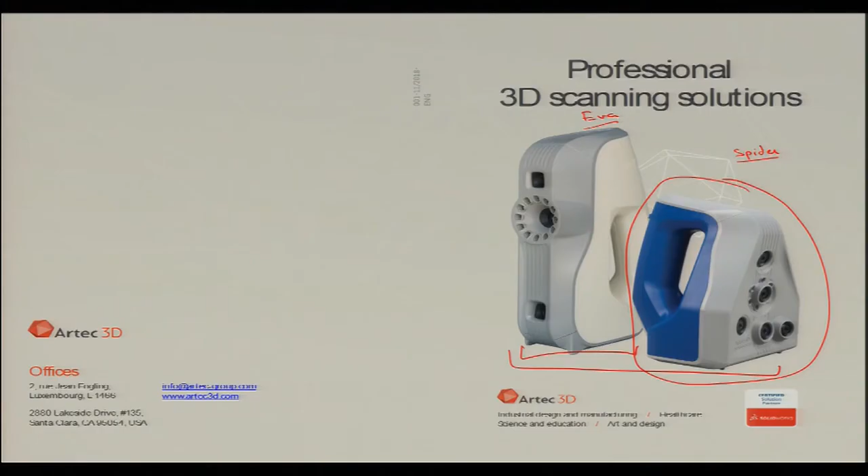Artec Eva can scan objects and we can have high resolution objects here. It is a tried and trusted product, as the companies say, used in a wide range of industries such as quality control, automotive, medicine, and heritage preservation.

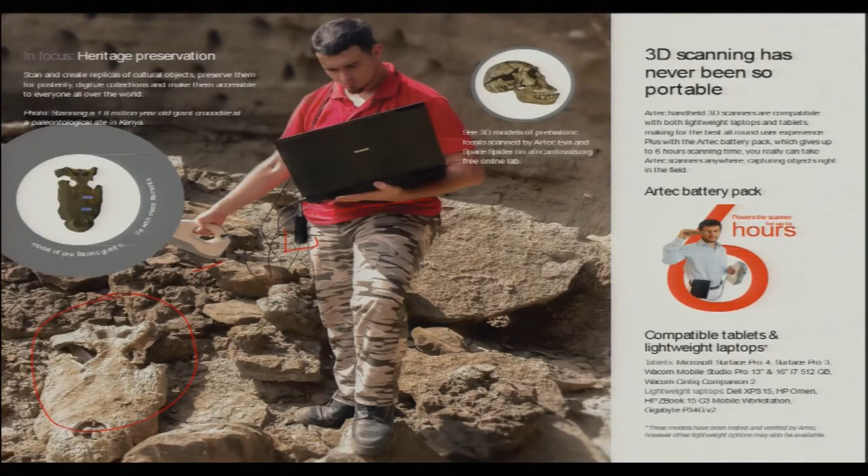This can be done in two ways. Either we rotate the object that we need to scan - I put my scanner in a stationary position and rotate the object, which is what we will do in the lab. Or, if the object is big and we cannot rotate it, or we don't have a turntable, we can keep the object stationary and take our scanner around it.

What it is essentially doing is taking multiple images, like a panorama view in our mobile or regular cameras. We have multiple pictures that are aligned into one. They select a raster line - when there is some overlapping, they select this point where the overlapping happens and produce this object. This raster kind of scanning is done using this scanner.

The other scanner, ATOS Pizza, which we will discuss in the next lecture, is a kind of CMM machine. We have different circles and those are then enclosed - there is no overlapping, no rastering involved.

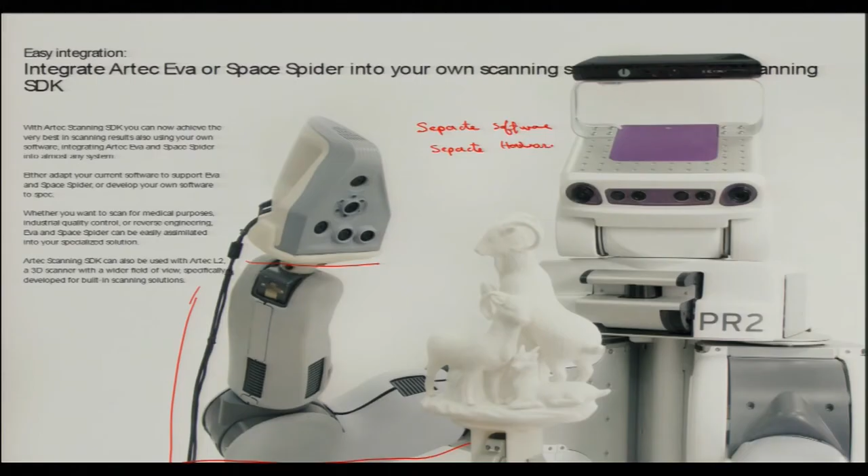With this scanner we can achieve the best results using our own software, a separate software, and separate hardware. The separate softwares can interface with manufacturing, additive manufacturing, and even non-additive manufacturing. The hardware, like this robotic arm, helps support this 3D scanner.

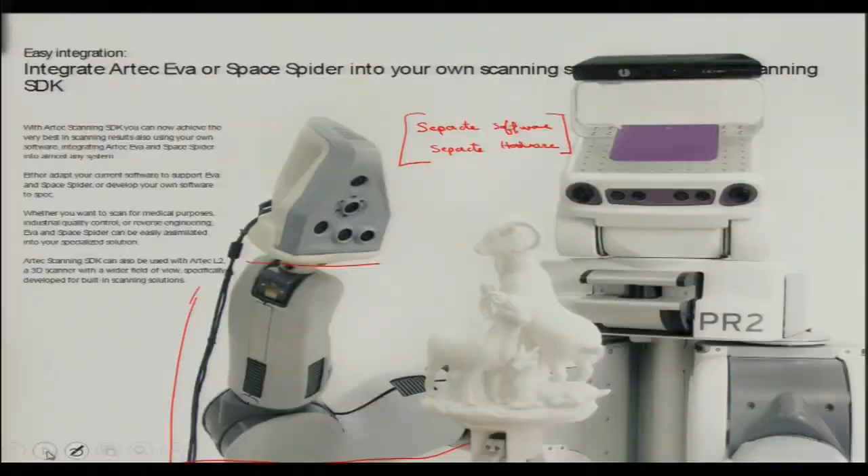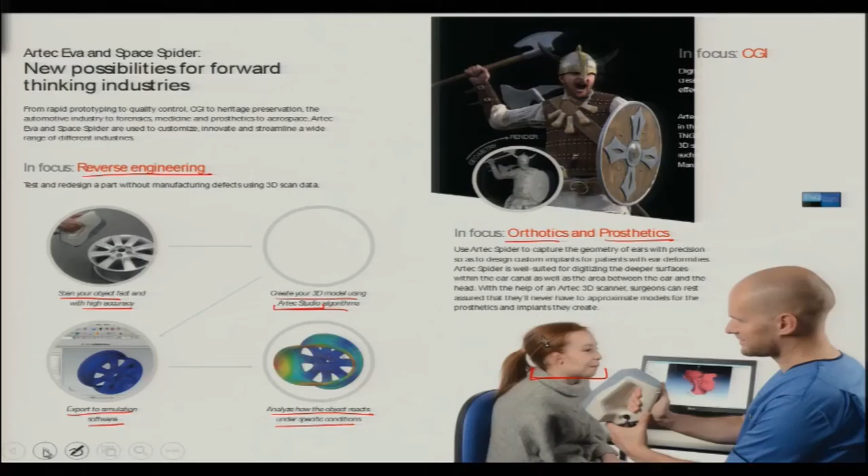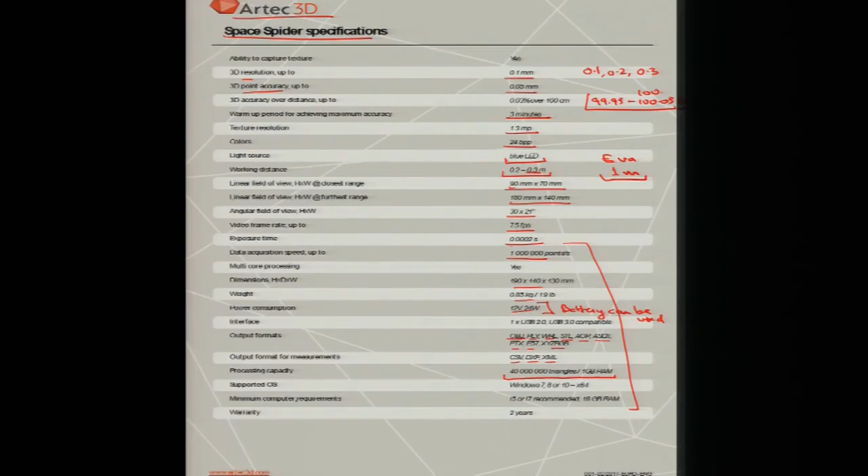Processing capacity is 40 million triangles per GB of RAM. It can support Windows 7, 8, 10, and so on - these are the computer requirements that they specify. Warranty and all those specifications are there.

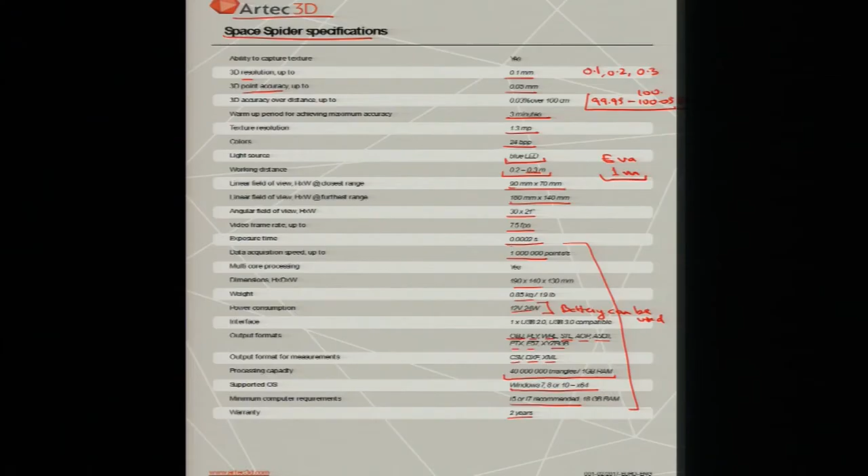But this is not a restriction. Even if we have the Artec Space Spider model with us, this can also be used to develop models for bigger objects. Only thing is it will take more time, because the field view is lower, and second, we have to be a little closer to the object, lesser than 0.3 meters.

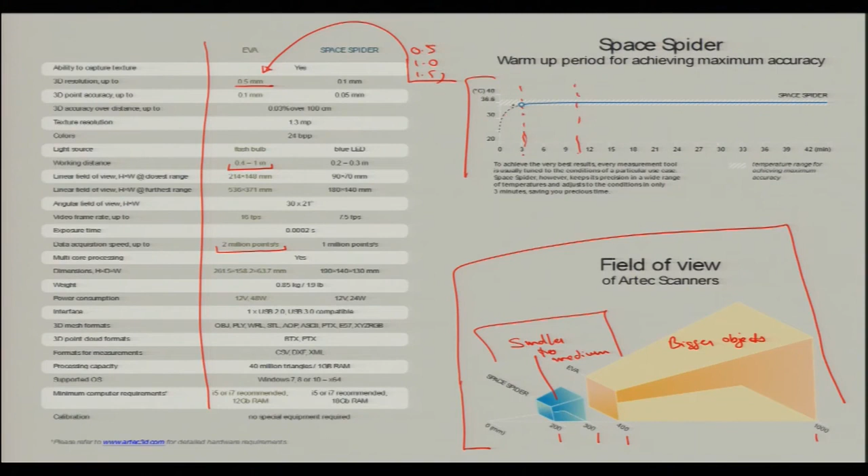So this is the warm up period that I mentioned - 3 minutes is the warm up period as specified by the company, but our scanner is taking around 10 minutes. Our warm up period is something like this, and the temperature that we go up to is 45 to 50 degrees. So in our scanner, the piece that we have will go up to 45 degrees in 10 minutes.

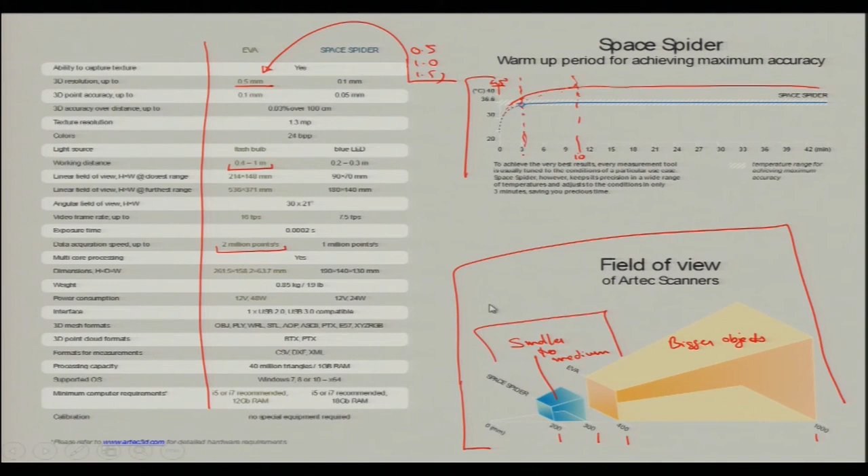Right, so this was a general overview of the specifications of the equipment that we have in our laboratory. Now let us get back to the laboratory and see.

Okay, again this is a handheld scanner - lightweight and handheld. The weight is less than 1 kg, and we can work with this. Now we can use it in multiple ways. As I said before, we can either take a turntable and put the object over there and rotate it, or we can scan bigger bodies by picking up this scanner and just moving around and scanning the data. So this can happen.

Because it is portable, we can even use multiple scanners. We can have 2, 3, or 4 scanners for scanning a single object. That would save time, as they can develop 2-3 different models and then combine them in our software. So that can also happen.

So there are 4 cameras here which are known as receivers. This is the laser generator, and this is camera, camera, camera and camera.

So this is a blue light scanner that does not harm the skin. The blue light is generated, and we will show you when it flashes, when the blinking happens, that you can see when we operate this thing. The receiver receives the signal from varied angles, and with this kind of scanner it can scan a geometry as well as texture.

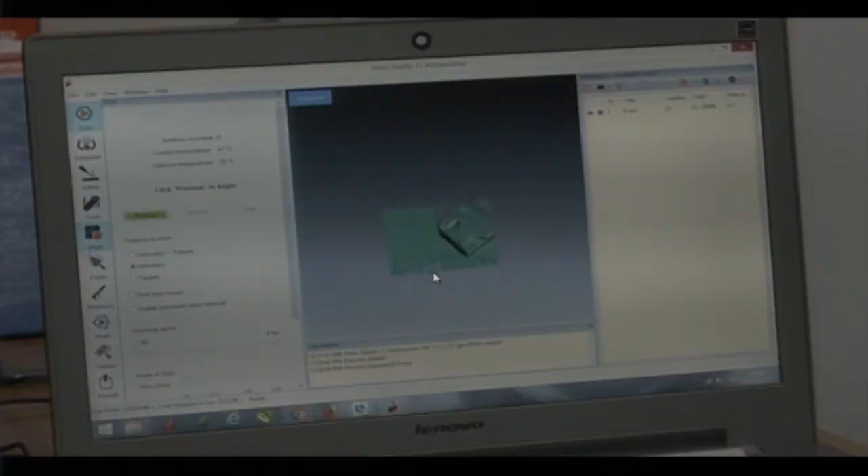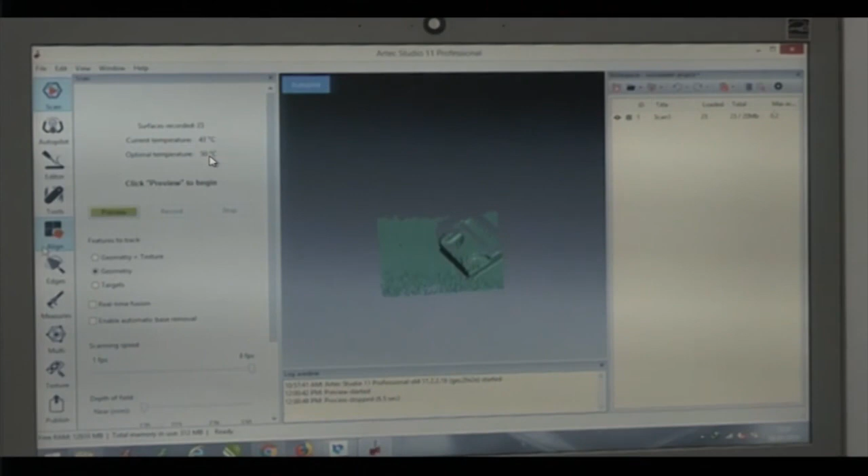As I mentioned, this scanner, when we start, takes a few minutes to warm up, which is known as soaking time. So that is happening. The laser source is getting some temperature elevation, and this is called activation of laser. Normally it is 45 degrees. The current temperature is around 47 to 50 degrees. Optimal temperature we have set at 50 degrees. So this is the temperature that is required for the scanning device. As the temperature rises, the laser source gets excited and activated properly, and then we can start the scanning.

So this is Artec Studio 11 software, provided by the same vendor, Artec 3D. This software meets the needs of professionals at any experience level and boasts numerous automated features. One of the state of the art features here is autopilot.

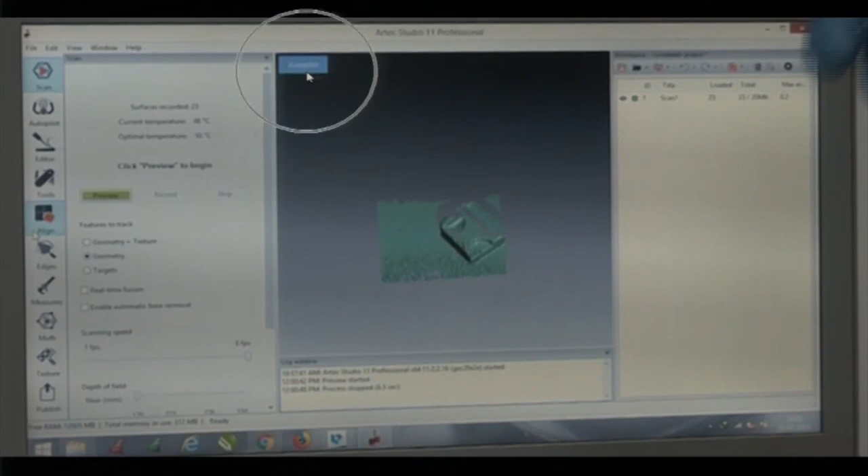Autopilot, the 'auto' means it is something automatic, and it creates professional grade 3D models of any size. Users are guided through a few simple questions related to the characteristics of the object being scanned and the type of 3D model desired. This software deletes any unwanted captured data, auto-aligns the scans with one click, and selects the most effective 3D algorithms for the data required. It helps create a high precision 3D model of the same quality as one created manually by an experienced user. We won't work with autopilot mode because we need to show you the demonstration.

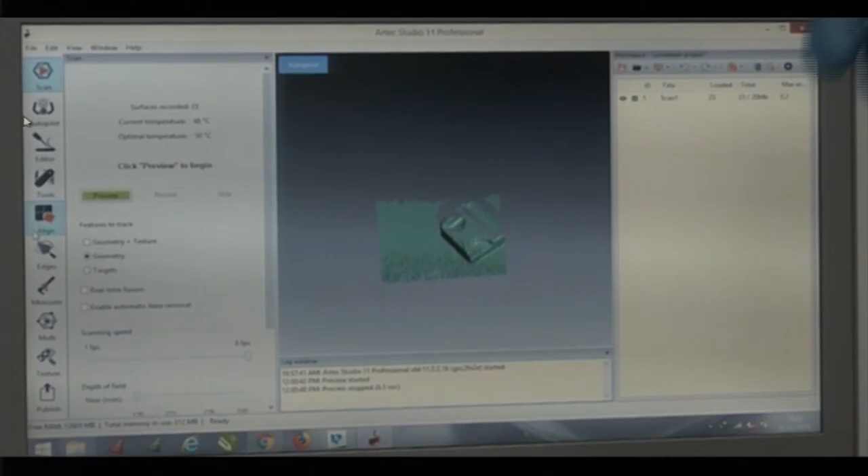We will work with manual mode here. Autopilot makes the process so easy that a beginner can use it without the intense formal training that was once required. However, expert users prefer not to use these autopilot features because they like to work on their own. Expert users can also leverage this intuitive feature, because it provides a quick pathway to achieving the highest quality model. Sometimes they also use this one.

So the very first option here is scan, as the purpose is to scan the object. When we click it, the scanning happens. In the same way, this is autopilot, the second option. So we are in manual mode actually, we always go for the handheld option manually.

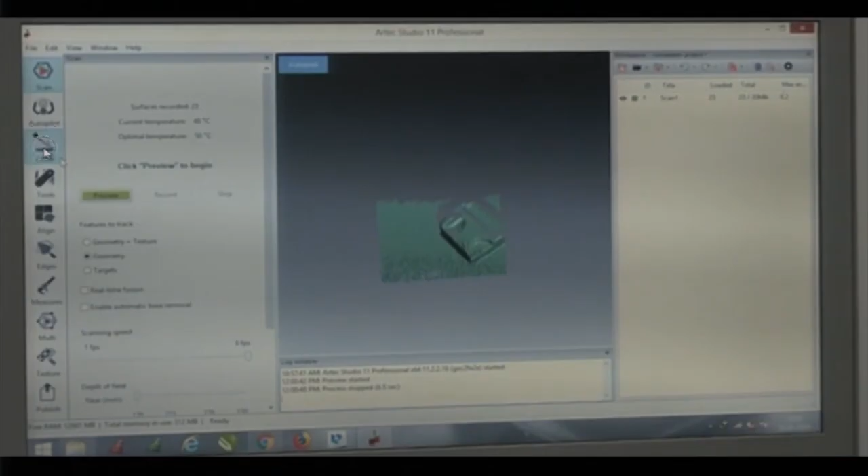The third one is editor. So we can edit the object that we scanned, for instance making some pockets or any kind of alteration, so that can happen.

Next is tools. This is a toolbar system where we can have various options, various kinds of tools. We can remove noises, we can make some changes, and so on.

Next is align. Alignment is when we align various different scans and try to produce a single model out of that.

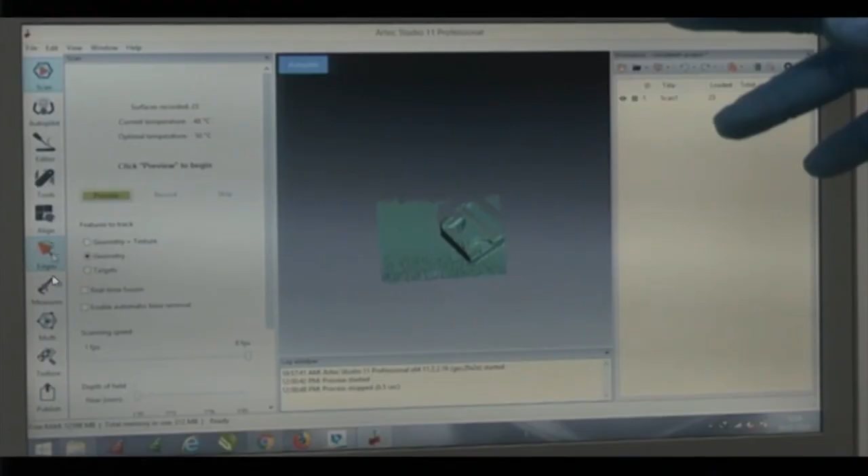Next is edges. Edges is an important feature, and I can even say it is a special feature, because we know that an object can have an edge, a profile, textures. Edges is mentioned separately because whenever we go for scanning, when the light strikes the edges, it normally diverges in multiple ways. This is known as diffraction.

What is diffraction of light? Diffraction of light is the scattering of light when it hits the edges. It is actually a slight bending of light as it passes around the edges of an object. The amount of bending depends upon the relative size of the wavelength of the light to the size of the opening. So this is diffraction. To counter that, we have edges as an option. If we click edges, it will complete the edges by itself. In this way, we can find thin profiles or sharp corners.

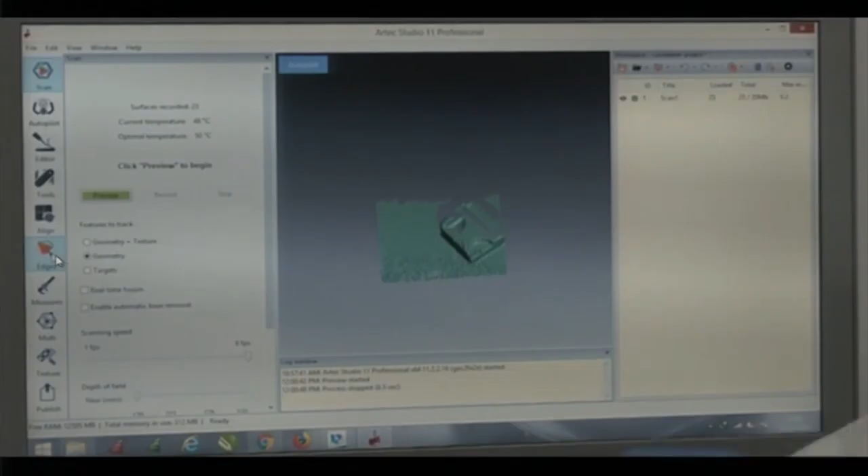Next we have measures, so we can measure the size or dimensions of the object we have scanned. And this is texture.

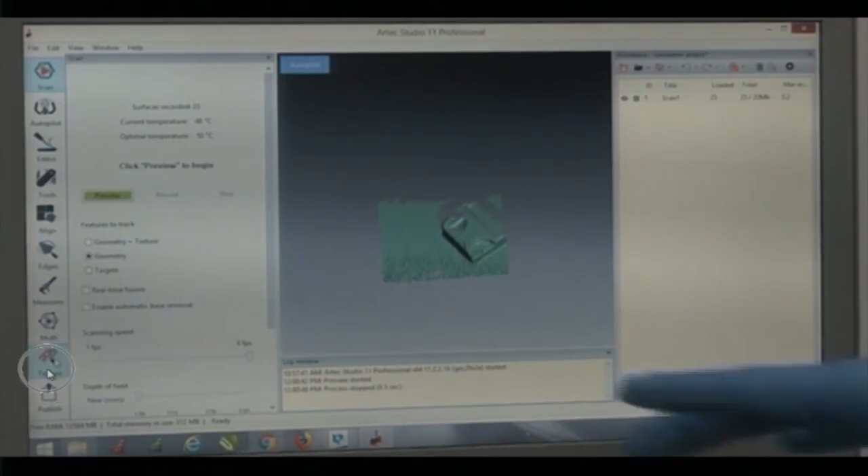As we can scan a body or a geometry, and also we can scan texture. Texture is something for color reflection, color deviation, or peaks and valleys, some shades in profile. That can be taken with the use of this feature, texture. So we can scan geometry, we can scan texture.

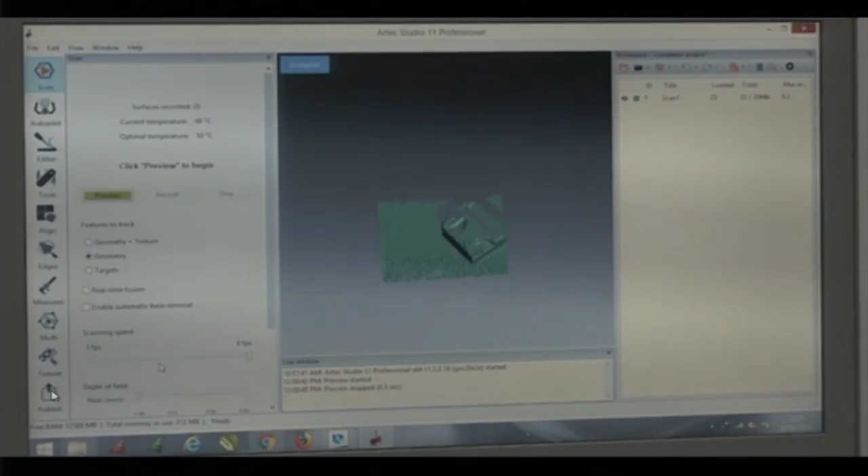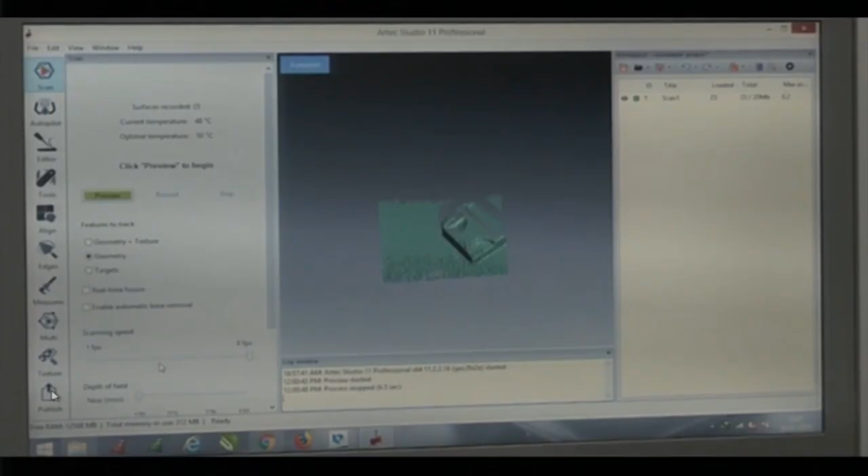Now this is publish. Publish is simple, it is nothing but saving the file in different formats, because we can export this file into various softwares such as SolidWorks, CATIA, ANSYS to conduct analysis. Inventor is one of the softwares. So we can export the model with help of publish. We can save the CAD model in different extensions that I showed you in the specifications of the equipment. So we can save different files such as .stl, .igs, and then we open and access the same model in some other software.

We are now going to conduct this scanning. As we mentioned earlier, this scanner can scan big objects, but this is a small object that we have here.

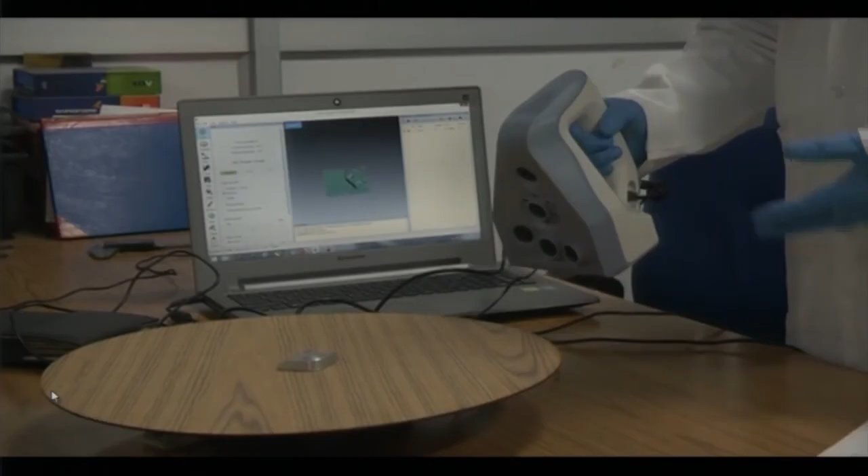Either the scanner can rotate around the object or the object can rotate. This is a turntable that helps to rotate the object, it helps to rotate the job here. If the job is kept stationary, we can move around it. This is one way we can take it around. It all depends on whatever is convenient for the user.

To start this, there is a button at the back, a green button, that helps to switch it on. This is just at the reach of the thumb of the operator who is using this scanner. When we switch this on, you can see the scanning starts, the blinking and the scanning starts. You can see on the screen, it is trying to record the data.

There has to be some optimum distance from the object, between a specific range, as mentioned. We are rotating the object. Different orientations of the object are coming in contact with the lenses, with the light, slowly, and the product is being scanned. You can see this green light here, this green light means the distance is good. You can see the scanning and flashing going on here. This is the optimum distance between the object and the scanner. This is very important to keep.

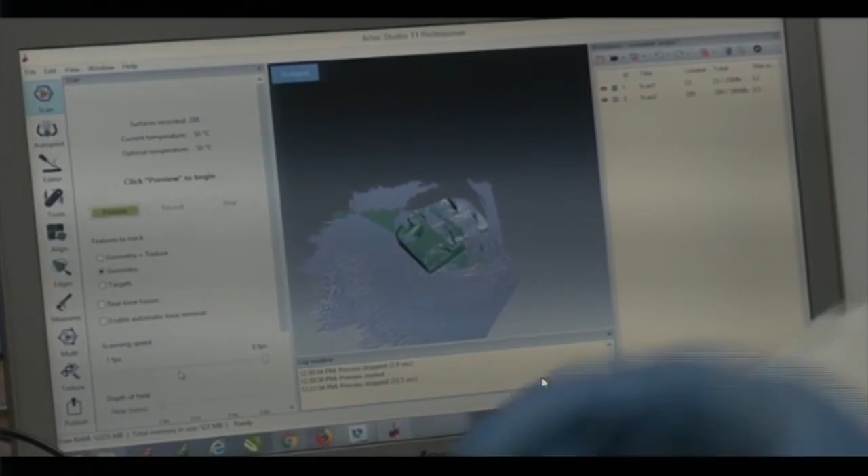See, we are rotating here and we are trying to scan the object. So we have developed this data as per the dimensions or the features of the object. This model is generated here. You can see this object has various features like the hemispherical, the cuboidal angle, edges, and a bulgy profile. This is actually free form geometry.

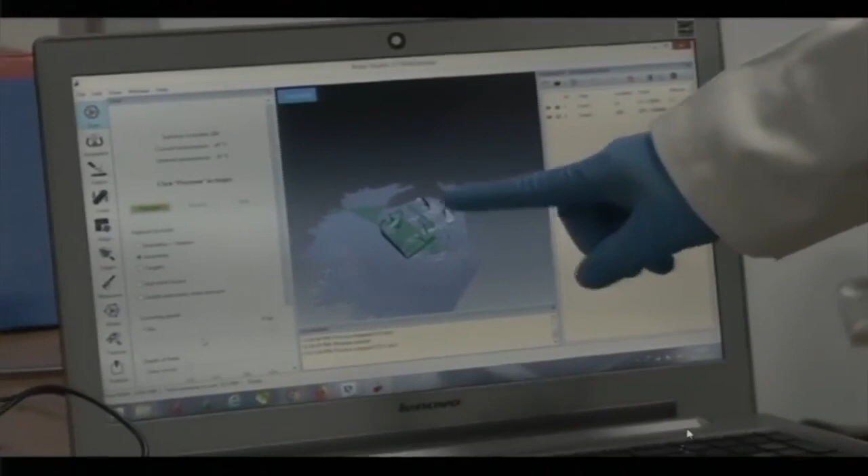But one point is that this is made up of aluminum, which means it has a shiny surface. You can see that this data is not developed properly at some points, the color is not green. The reason is that aluminum is a shiny metal and there is a luster that does not let the light reflect back to the lens, so it is not reflecting in the proper way. So we need to cover the shiny surface, that is important when we scan any lustrous material.

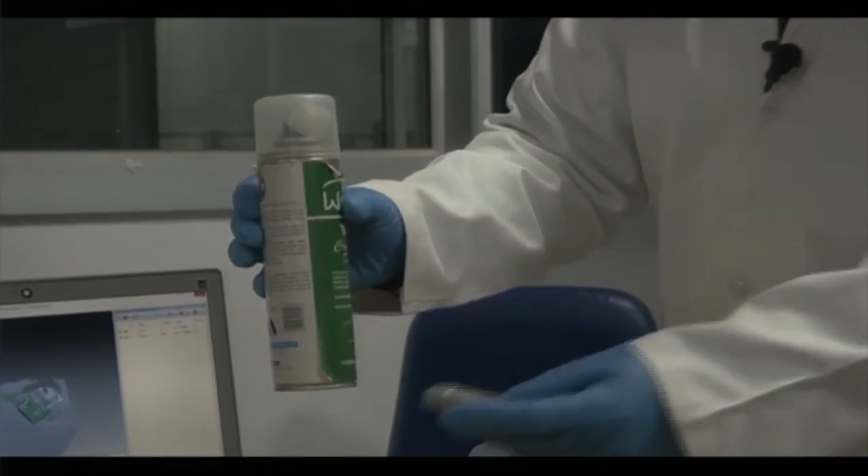So we use this developer. This is a liquid spray, this can has gas and powder in it, of a milky white color. When we spray it, you can see it is developing a coating over the object. When this solidifies, it will be white. So it has made a white thin coating of powder here.

This is W1003 developer. It has hidden all the shiny surface so scanning can happen easily. As we know, when light strikes a white color, the diffraction is very less. Another contrast to this is that we cannot scan black objects, black objects would absorb the light if we try to scan those. So black objects are not at all scanned with this scanner. If the objects are black, we need to provide some developer on them and then that can be scanned, because the light has to be reflected back.

So this developer is removable, it is very easily removable with water or with brushes as well. This is the way we are using this scanning here. So developer is applied, and these cameras will capture the data without any light scattering now.

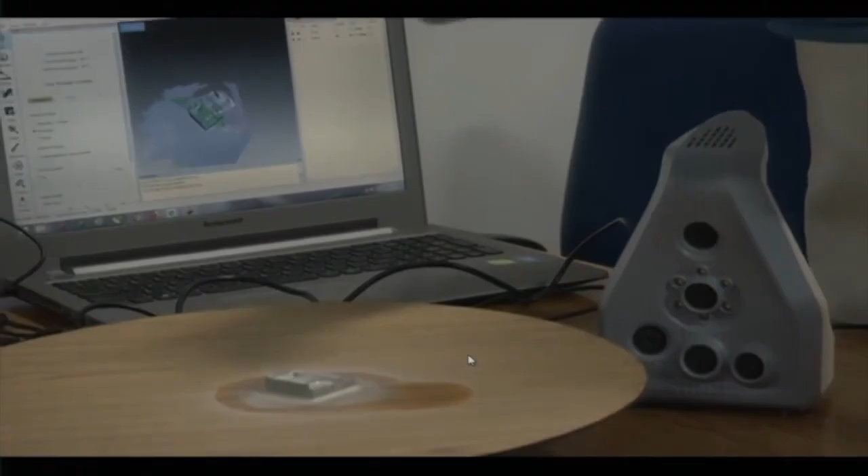That will strike properly back to the reflector. So, this powder coating is always used when we have a shiny surface or black surface. This developer can be removed properly by using acetone, a cleaner. This is W1003 developer, and this spray helps to scan the objects properly.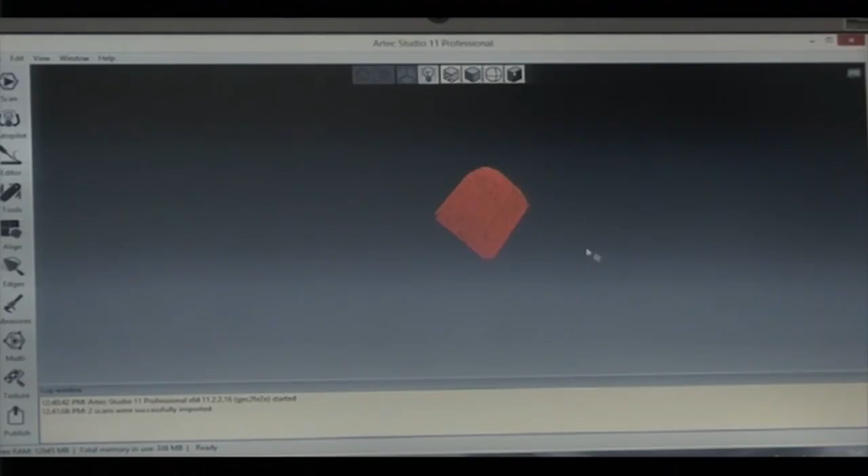Now this is the object that we have obtained after the complete scanning. You can see the different views of this. This is point cloud, this is point data of the different points that we have found.

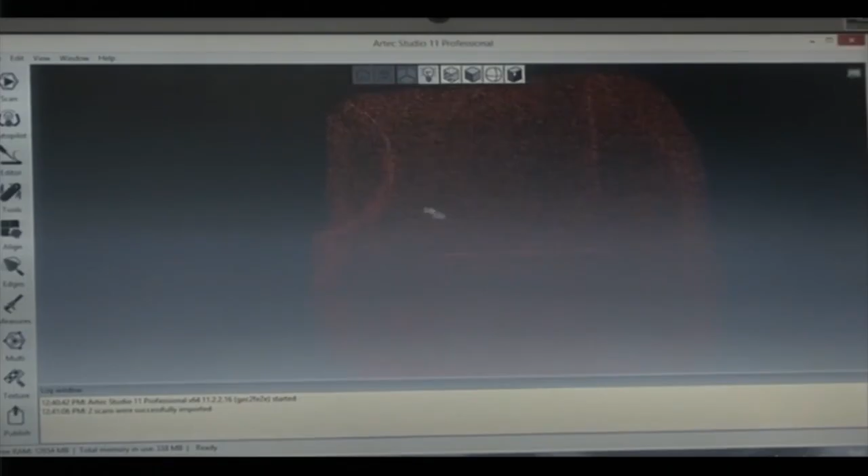This point cloud helps to get the mesh, and that mesh helps to develop this solid model.

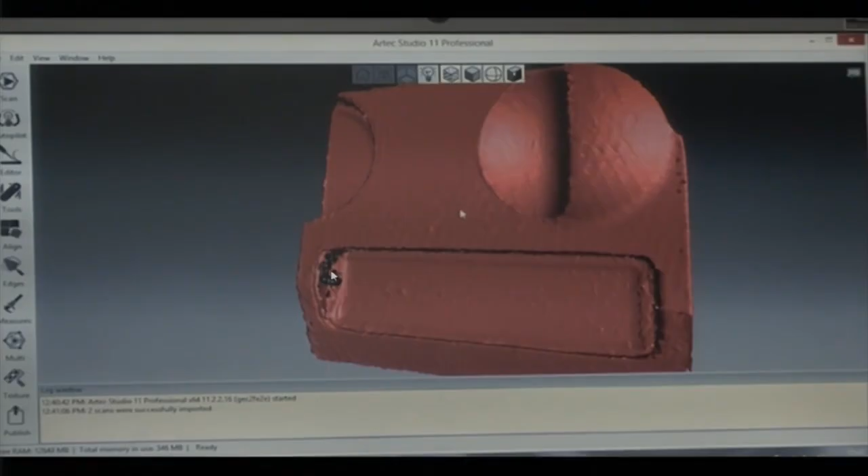So you can see there is a small flaw here. This data is not captured, but we can work to get this corrected. You can also see that here the edges are not formed properly, so at edges also there are certain other errors those which are formed, you can see here.

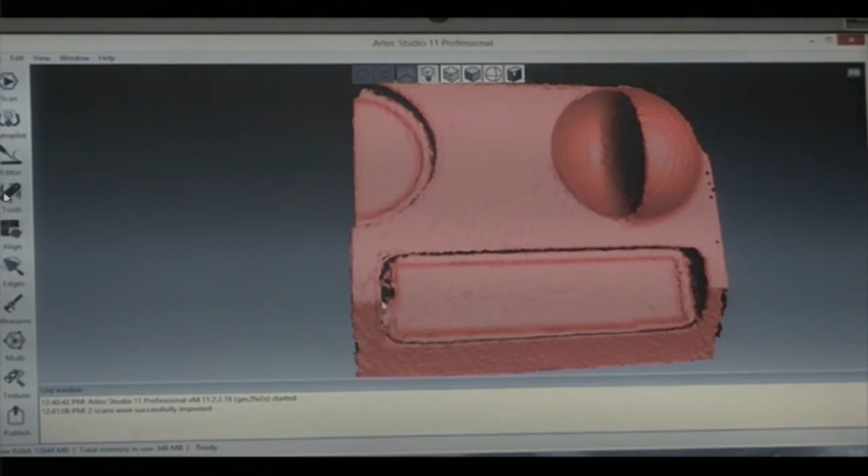So we can use tools, we can use tools to rectify this. These are tools to work on this.

So this is a software that is RapidForm.

The scanning device is one which can help us to develop the data, develop the cloud data. Then we need to work on this cloud data. We export the data to the softwares. This software is RapidForm, which has a new version, GeoMagic. Now this is taken over by GeoMagic, and these two are the same. So we can open the same model in different softwares for work, for modification, for changes, for actually implementing into manufacturing. So we have exported into this RapidForm.

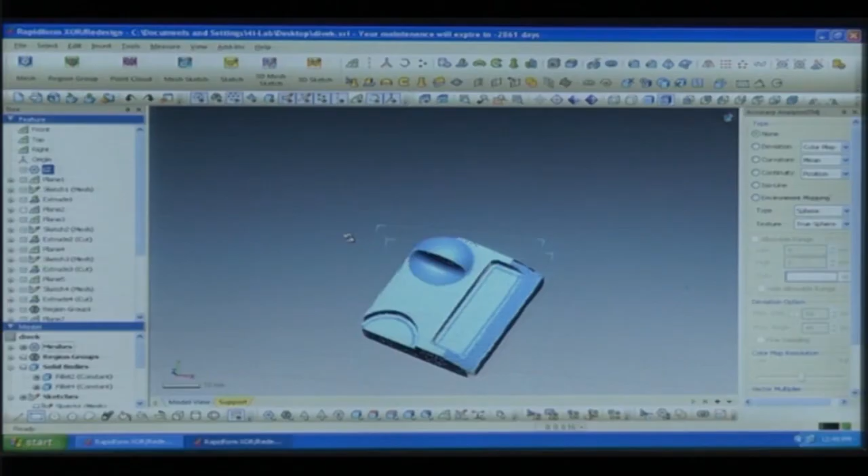We can see the different groups here, region groups. So when we click here, we get different colors here. These colors are patches. When we do scanning, it develops the data in patches form. These patches are then overlapped, or they help us to get the object, as I said, the raster way.

So we can also see different region groups. If I click here, region groups is clicked here, we get these patches. There are different patches. So these are used to develop this solid model or the surface.

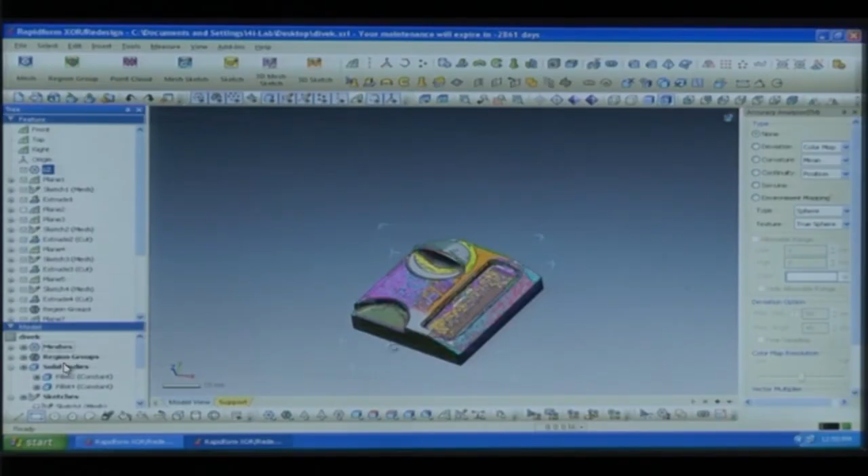So we can also see this solid model. This is the solid body. We have clicked solid body here. We can see this solid body, it is worked upon. Also we can see the meshes. So this is a solid body. We have closed the meshes. This is the final body that we have generated using this, but this is developed using the scan data.

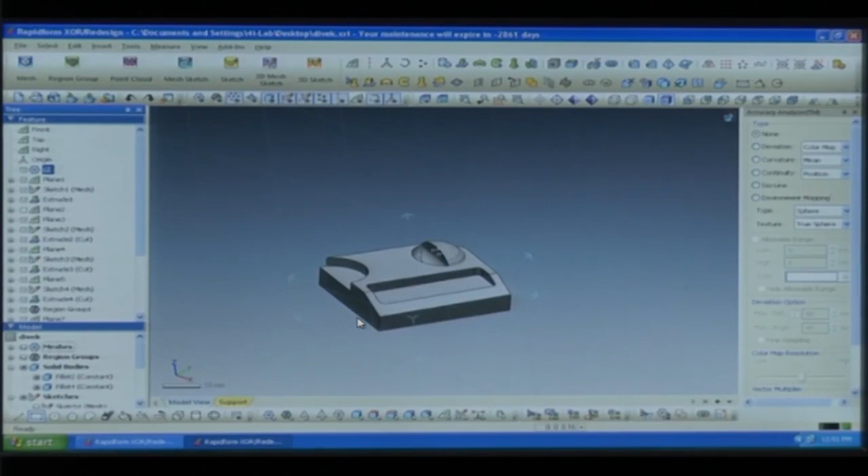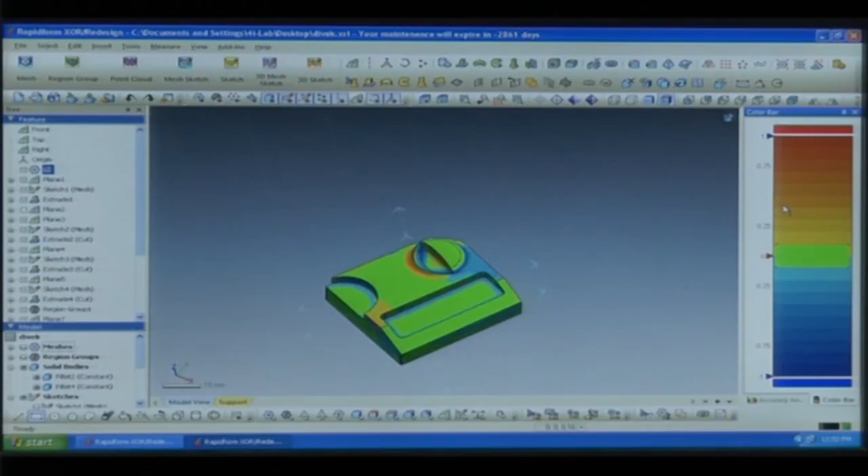So, this is the final object that we have obtained using our ARTEC 3D Space Spider scanner, and we can work on this. We have just showed you the demonstration on how to use this scanner, what is this scanner, what is the principle on which this scanner works, but we have not shown you the exact data cleaning that we call it. Data cleaning is working on the data, working on edges, working on holes, that would be very extensive. So, you are most welcome to come to IIT Kanpur to see the demonstrations on this further. So, this is all about the scanning using ARTEC 3D Space Spider equipment.